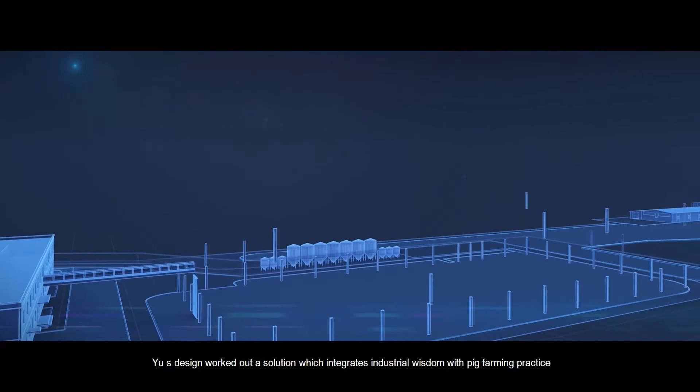Along with the development of China's rural economy, the pig industry has emerged to modern large-scale farms from traditional small-scale backyard farms. In responding to the challenges such as disease prevention and control, environmental pollution and resources shortage that pig producers encounter in their farming operation, Yu's design worked out a solution which integrates industrial wisdom with pig farming

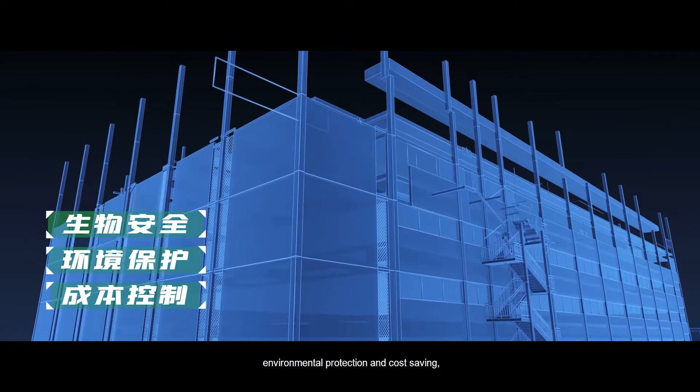practice. Yu's multi-story building barn demonstrates outstanding advantages in biosafety control, environmental protection, and cost saving, so as to achieve a harmonious coexistence of living environment for human beings and pig-producing ecological environment. It also contributes to make the pig industry emerge positively to the whole large agriculture, as well as further to the social and economic development of the virtuous cycle.

Strengthening biosafety control and making the pig raising simple. Biosafety control is one of the most important things to be considered in pig barn design. Its emphasis is on protection from outside virus invasion, on internal control to avoid the spreading of disease to outside, and finally on precisely eliminating diseases.

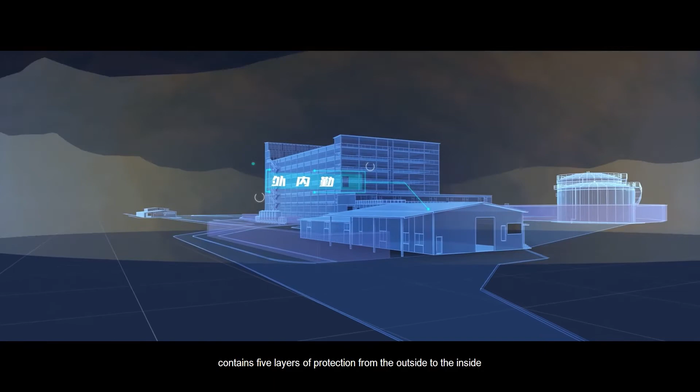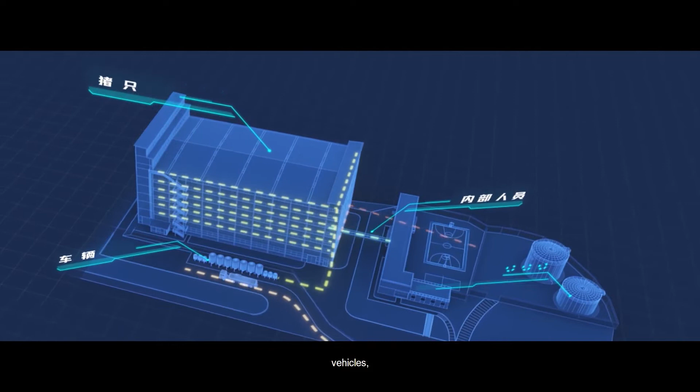The Yu's design version 5.1 barn building contains 5 layers of protection from the outside to the inside, and the safety intensity is improved step by step to effectively cut off the external pathogen transmission route. At the Yu's barn building, each floor was designed to be isolated from other floor areas. It helps reduce the risk of cross-contamination from people, vehicles, supplies, pigs, and sewage inside the barn.

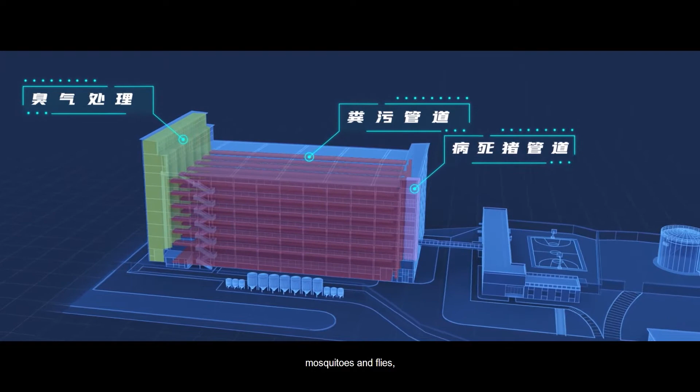In addition, with the advantage of 3-dimensional transportation pipeline, the barn can quickly carry out immediate harmless removal of potential pathogens, dead pigs, feces, stench, prevent the spread of diseases through the air, mosquitoes, and flies, and improve the level of biological safety of the whole field.

Favor the environmental protection and improve the surrounding environment. Protecting the environment can ensure the sustainable development of the pig industry. The Yu's design version 5.1 building barn can eliminate water waste from the original source so as to help reduce the total amount of sewage.

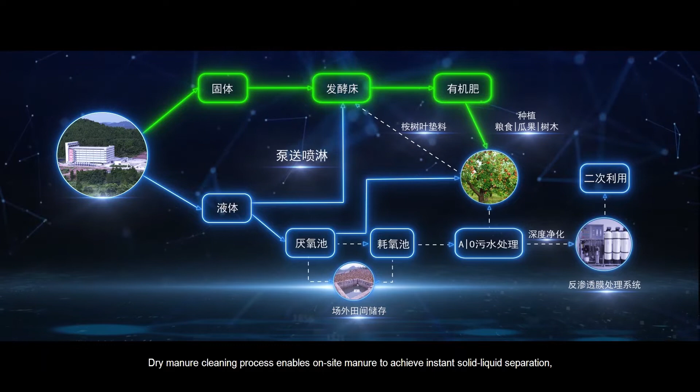Dry manure cleaning process enables on-site manure to achieve instant solid-liquid separation, reduces the concentration of sewage, greatly reduces the pressure of wastewater treatment in the later stage, and further realizes zero discharge through resource utilization.

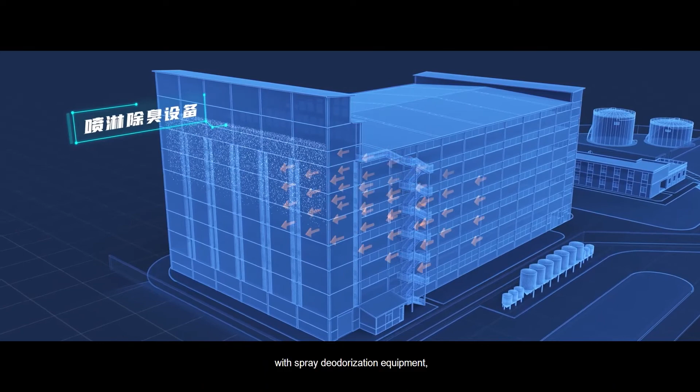Its unique air tower structure, with spray deodorization equipment, external exhaust gas centralized treatment, instant disinfection deodorization, effectively improves the surrounding air environment. In addition, all doors, windows, and air inlets connected with the outside world should be installed with mosquito and fly prevention nets to effectively prevent outside mosquitoes and flies from entering.

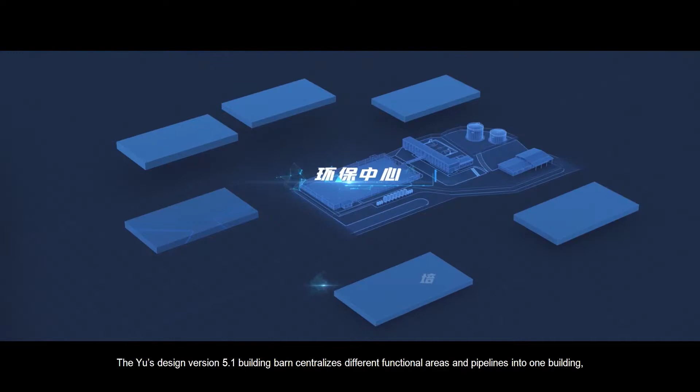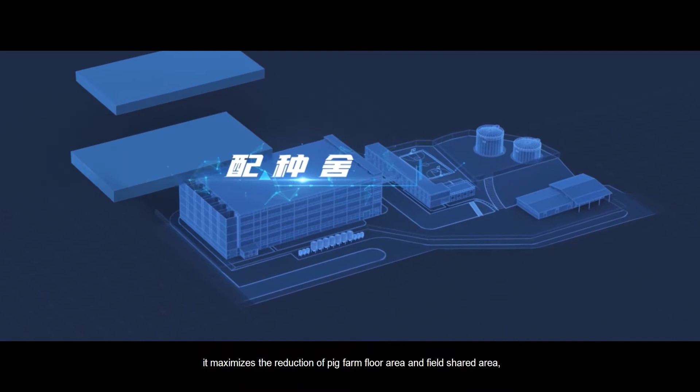Significantly reduce costs and improve benefits. Cost control is directly related to the maximization of pig farming companies' benefits. The Yu's design version 5.1 building barn centralizes different functional areas and pipelines into one building. It maximizes the reduction of pig farm floor area and field shared area, and reduces fixed investment costs.

Secondly, the effective combination of architecture and technology through natural lighting and heat exchange ventilation mode can not only achieve constant temperature in the barn, but also greatly reduces the overall energy consumption and operating costs.

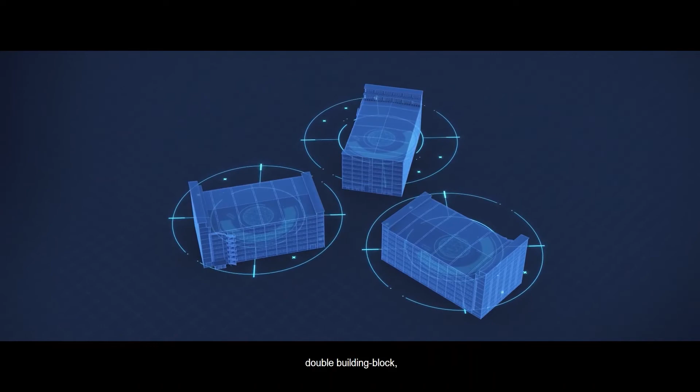Customized layout design. Achieve more alternative options. Apart from the 3 advantages in biosafety, environmental protection, and cost control, the Yu's design version 5.1 building barn also provides different design compositions, including single building block, double building block, 3 building block, 4 building block, 6 building block, and other layout designs.

It can adapt to different regions, geology, and climate, and can fully meet the needs of customers with different breeding patterns and scales. At present, this kind of building barn is adopted by Tianzow, Wens, Lihua, and other well-known domestic pig companies. More than 100 Yu's design building barn projects are under construction.

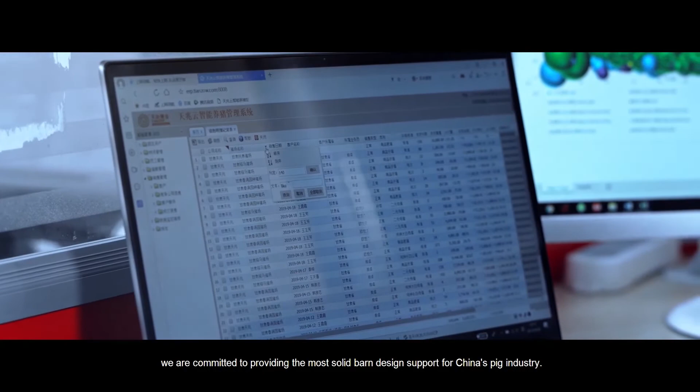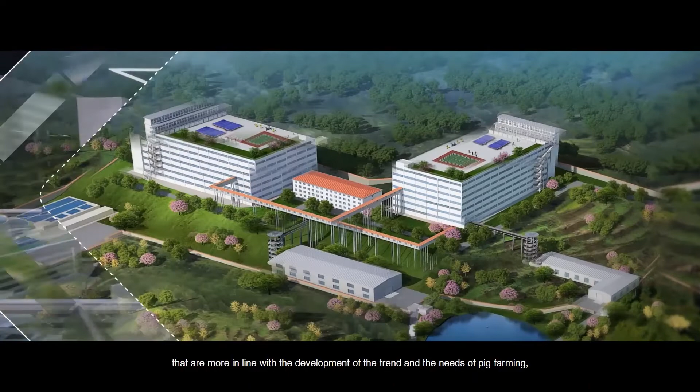At present, China's pig industry is in a critical period of industrial transformation. From a professional point of view, we are committed to providing the most solid barn design support for China's pig industry. In the future, we will continue to innovate and design technology-driven pig barns that are more in line with the development of the trend and the needs of pig farming, so as to help China grow from a big farming country to a strong pig farming country.

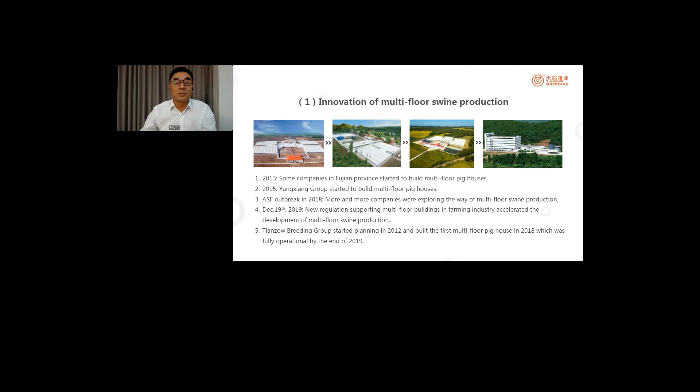Okay, why do we want to have this multi-floor swine production? Because, like everybody knows, in China we have 1.4 billion people and 700 million pigs a year. I don't know how many billions of chickens, how many billions of other animals. We've got so many animals on limited land. As a consequence, we have great pressure for biosecurity and environmental protection. So that is why we are thinking about a different way to build our pig farms.

Up until now, if we are talking about the model of multi-floor swine production, we have single buildings and double buildings, 3 buildings, 4 buildings, 6 buildings, and actually there is a biggest one in Henan. They've got 22 buildings, and their capacity is about 2.2 million pigs output a year. I think they just started production last year.

And in terms of how many floors, you guys maybe want to know, from 3; actually at Tianzow we normally have 6 to 8, but somebody else has 11, 15, even one building is 26, it's very high.

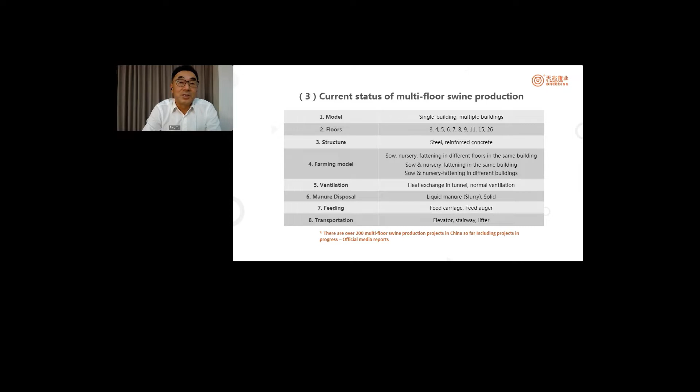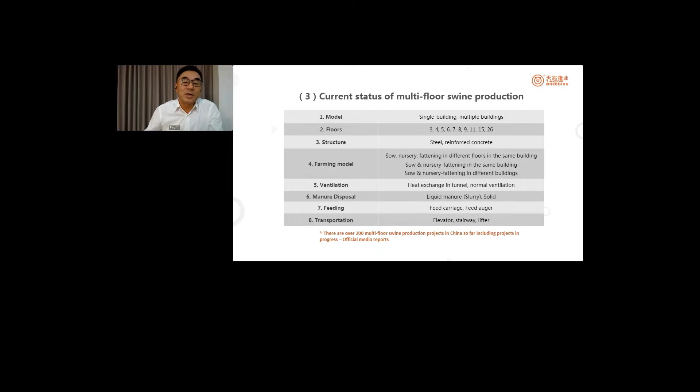And for transportation, we use the elevator, we use a stairway, and we use a lift. And we also use this passage, like a 10 degree slope passage. We can transport the pigs from an upper floor to a lower floor, or from the lower floor to upper floors. And up until now, according to somebody's statistics, in China we have more than 200 projects for multi-floor pig farms.

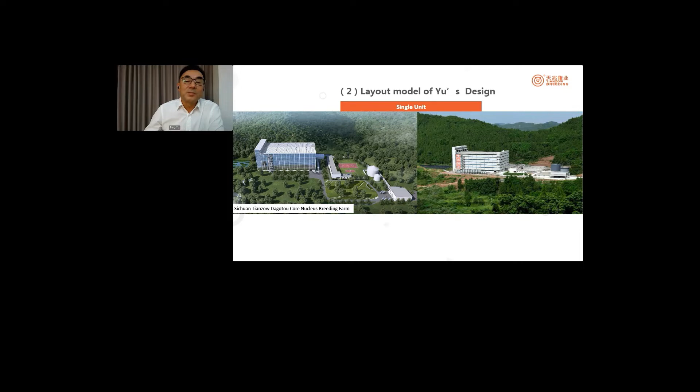So now at Tianzow, with version 5, we've got 28 buildings. We've got 45 buildings for Tianzow. And also we service some other companies to build another 13 buildings, so we have almost 50-some buildings already, up until now. So this is the building we built in China. And in terms of layout of the model, we have a single layout. Actually, this is my first multi-floor pig farm, which we built in 2018.

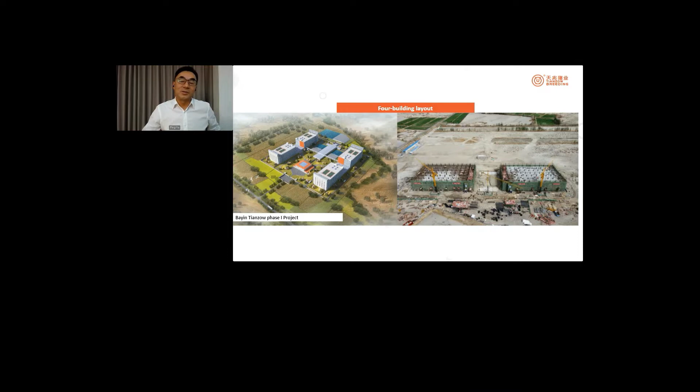Okay, here's the building in Xinjiang, northwest. So actually, we finished all the structures, but we did not finish the equipment installations this year because it's very cold. And we can finish next summer.

And again, here is in Heilongjiang. This is a 6 buildings layout. Still, we are going to finish next summer. And here is Gansu, Lanzhou, northwest. It's almost finished. So for 6 buildings, for each building, actually, I got 6 units of the nucleus herd.

Each nucleus herd includes 180 boars and also 3,600 sows, plus the 100% nursery, plus the gilts and the boar growers. So for this project, the capacity is 22,000 purebred sows. Up until now, we have more than 10,000 sows already.

Hopefully, I can have the 20,000 sows, the gilts and the sows, before the Chinese New Year. So for this one, we can have more than 500,000 pigs, including the piglets, a year, next year.

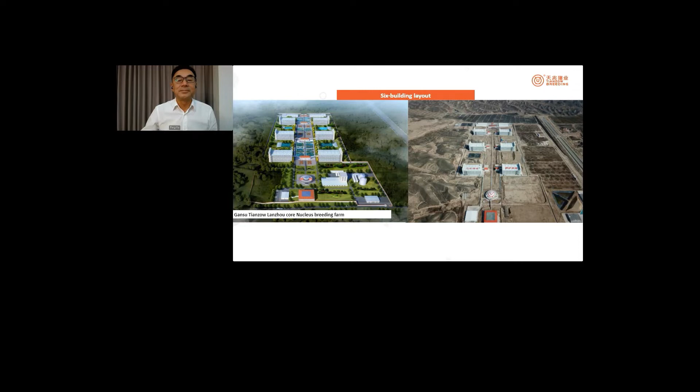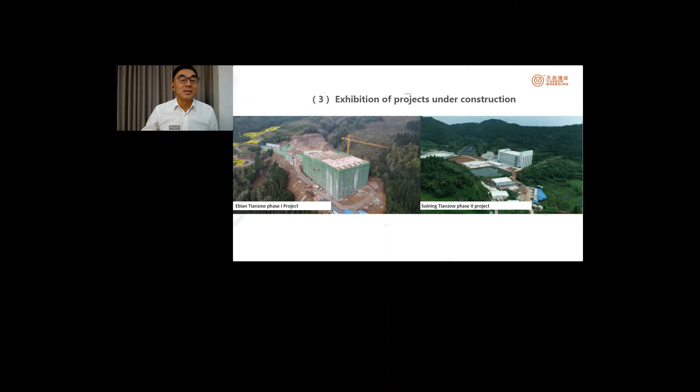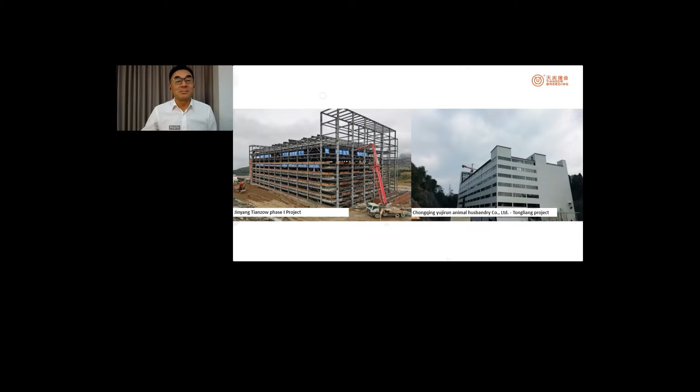Here are also some buildings in Sichuan area. The right one is concrete, and the left one is steel structures. Here is Huayuan. Oh yeah, that's in Chongqing. Okay, the left one is in Xinjiang. This is concrete, and the right one steel structures.

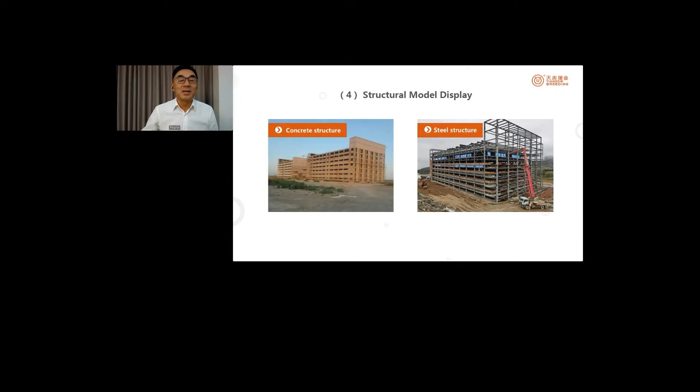Okay, here's how we are going to treat the odor. In terms of treating the odor, for the multi-floor building, it's much easier and cheaper to treat than the one-floor buildings, because it's easy to get this odor together. So for the treatment, I think it's easy. Just use water and the chemicals.

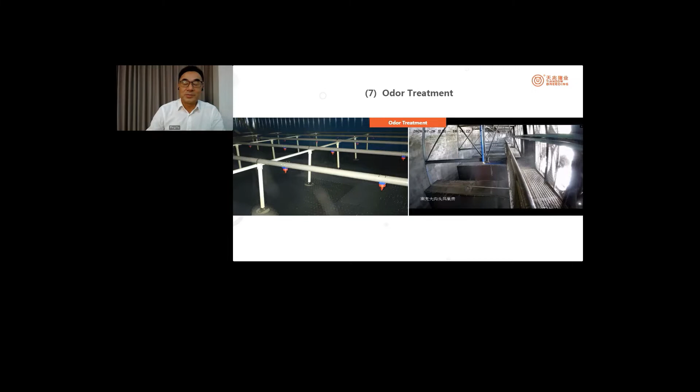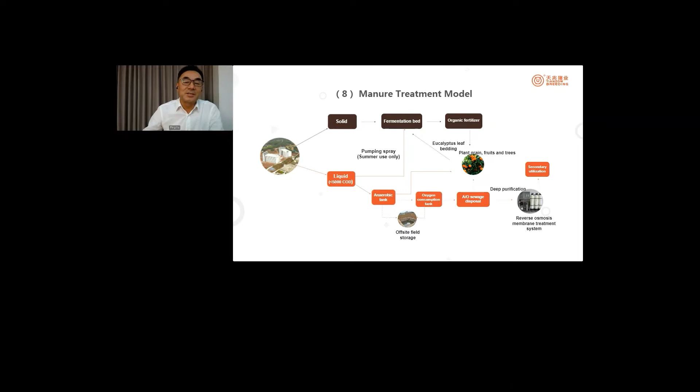In China, you know, we don't have so much land to absorb this liquid. So in some places we have to treat it up to second usage like washing, and also we can use this treated water to treat the odor. So we can reuse it. And of course, the solid is easy. We can make it fertilizer, and not much expense.

And for the future, for the multi-floor buildings, as I said to my friends, I have built so many one-floor pig farms for so many years, and I built these multi-floor building pig farms. And in the future, for Tianzhou, I'm not going to build single floor pig farms, because I think they got a lot of advantages. Okay, let me show you.

Number one, to save the land. Definitely to save the land, to use national land. Okay, there's no doubt about it. But I think this is not most important. I think the most important is environmental protection.

Just like I said, for the dry manure, it's easy to make fertilizer, to transport it, to use it. And for the dead pigs, it's easy from the upper floor to go down to the bottom directly, to go to the machine, to treat it the same day, maybe the same hours, and we can kill the bacteria. So it's easy to treat it.

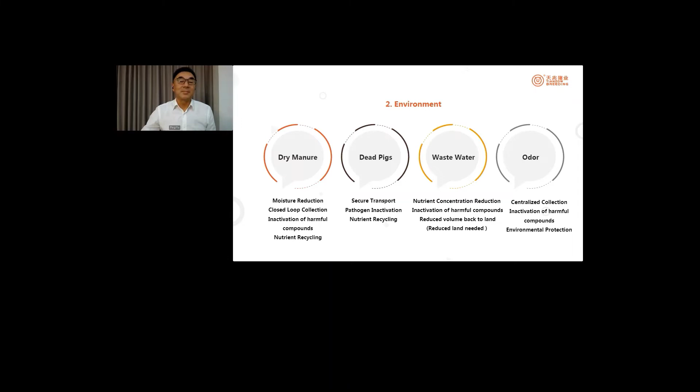So with a one floor building, because we've got so many fans, it goes everywhere, it's very difficult to collect it. It's difficult to treat it. But for the multiple floor pig farms, it's easy to collect it together and cheaper to treat it. So I think it's a big advantage for the multi-floor pig farms.

And for biosecurity, actually I'm majoring in highway and bridge. I think the expressway is always better than the country road, because they have the cars across bridges, and they cannot encounter each other.

So for the multiple floor, it's easy to transport the dead pigs, sick pigs, and it's easy to transport these modules, and also because we can build as many elevators as we need for the passage. It's not so expensive. So definitely for biosecurity, multiple floor is much better than single floor. And like I said, the biosecurity challenge is maybe the most challenging thing for the pig industry.

Okay, I think all of you are interested in the cost. What I can tell you, just for the building itself, I mean the construction itself, not including the cable, the pipe, the equipment, I think it's about 20% higher cost. But if you are talking about all the pipe, the cable, equipment, and in terms of unit cost per sow, per feeding pig, per nursery, it's cheaper than single floors.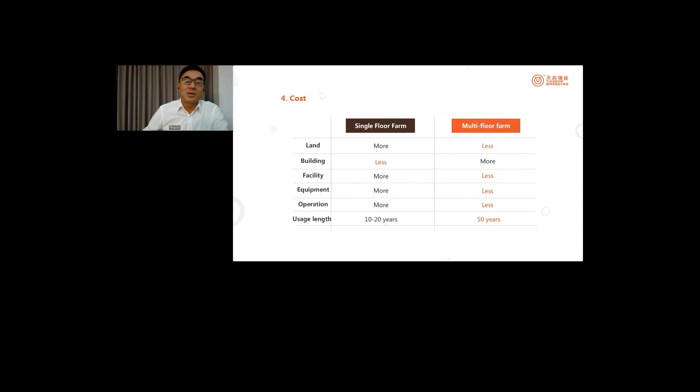Of course, these multi-floor pig farms have their weakness. For the one floor buildings, even a normal farmer can invest 1 million, 2 million for whatever size you can have. But for this building, for sure, you have to build a bigger one. So it means the total investment has to be big.

Just like this building, for me, it's about 60 to 70 million just for one building. About 32,000 square meters in total. So just this one building. So plus the live animals, everything, it needs 120 million something. I mean, including the working capital.

So it means the small farmer, medium-sized farmer, they cannot invest in it. Another one is the difficult choice between the different models, especially now in China, maybe all the world, because not so many people have experience with that. So a lot of debates, a lot of disputes, a lot of discussions. So now in China, it's very difficult to choose between the different models. Somebody says theirs is good, I'm going to say mine's good. So it's difficult for them to choose.

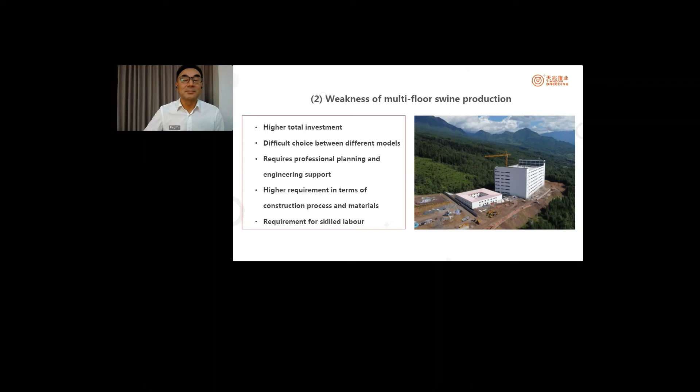Okay, so like I said, I'm not going to build single floor pig farms in the long run for Tianzhou, because I found so many advantages. And also, I think the Chinese swine industry will move forward with industrialization, automation, and AI too. And to achieve industrialization, automation, and AI, I think multiple floor production is more suitable. It's easy to install this kind of equipment, so that is what I think. Anyway, thank you so much. That's all.

Thank you, Dr. Yu. We really appreciate that. Very interesting presentation. So we are now going to jump into the Q&A session.

Okay, first question to you. What is the backup plan if the elevators fail for moving pigs to the ground floors? Okay, in terms of pigs, we have three ways. One elevator for the healthy pigs, good pigs, and another elevator for the sick pigs. And also we have the passage, like I said. The slope is about 10% for the healthy pigs, and also we have the channel for the dead pigs.